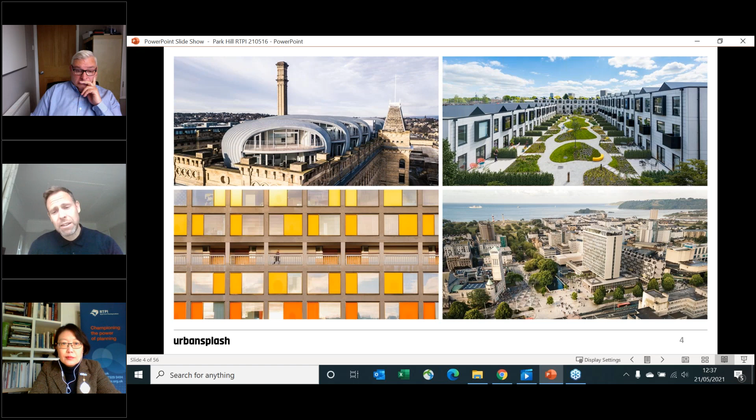We're very much known as an innovative developer, so very design-led, high-quality, design-focused, and we try to do things a little bit differently to other developers. I think we're known within the media as a transformative regeneration developer, and highly innovative. That's all really culminated in a lot of recognition and awards, and I think we're up at over 430 awards now, which is really rewarding for the people working so desperately hard to deliver such great places.

I have pleasure in focusing today on Park Hill. We've been working in partnership with Sheffield City Council to deliver a transformative regeneration of Park Hill. Urban Splash was procured as the council's development partner back in 2005, so we've been working on this scheme for quite some time.

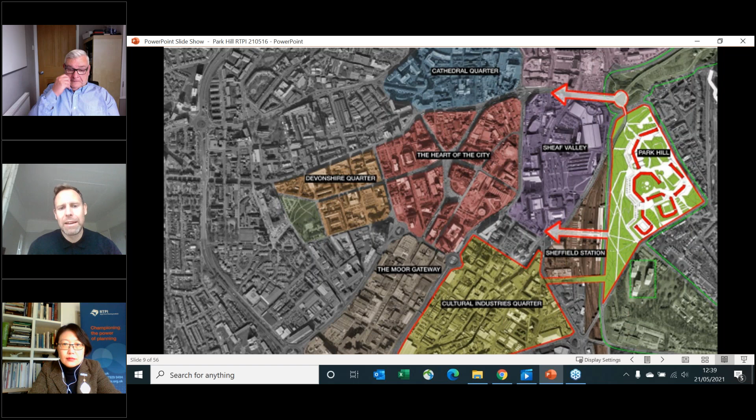In terms of the extent of Park Hill, we're dealing with 33 acres of land immediately to the east side of the city centre, and it could be a quarter of the city centre in its own right. Given its scale, it's really well connected - it's within a 5-minute walk to Sheffield Station, and within a 10-minute walk of the heart of the city. So it's very much a unique 33 acres of land within a UK city centre.

Park Hill is a redevelopment of 5 interlinking blocks. We've master planned it to include around 1,000 homes and about 130,000 square feet of commercial space across 5 phases, the first phase being outlined in yellow there.

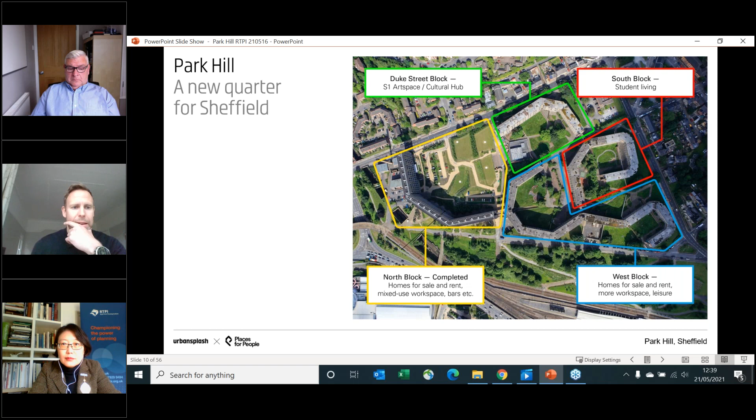In terms of where we've come from, Park Hill was delivered in the late 50s, early 60s, very much a vision of the 2 original architects, who were actually 2 young chaps, both in their 20s, called Jack Lynn and Ivor Smith, who worked for the City Council. A really quite radical design was delivered, particularly for its time - they delivered a brutalist structure. You can see the flanks of the buildings all crank in quite obtuse directions to maximize natural sunlight and the best aspects and views for the scheme.

The height of the roof is at the same level at the top of the site. We're dealing with quite an interesting topography - at the northern point of the site it's around 35 meters lower than the southern top part of the site. There's 13 stories at the northern point and only 4 stories at the southern point, but the roof level remains consistent throughout, so it's at exactly the same height at the northern point as it is at the southern point. The site is very much characterized by the infamous streets in the skies.

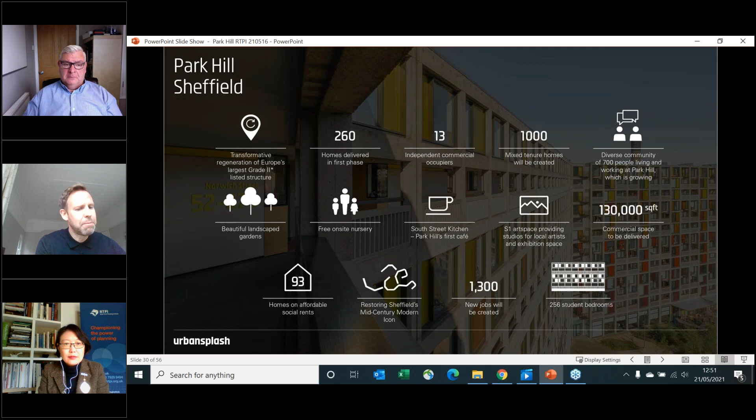We are very proud to say that we've achieved some really tangible socio-economic outputs from our involvement with regenerating Park Hill. It's always great to see the work to date also being recognised by people like Ivor Smith, who was the original architect at Park Hill.

Moving on to the present day, which is what we're dealing with at the moment, the delivery of the second phase of Park Hill. We're working with a London-based architect called Mikhail Riches, a Stirling Prize-winning architect, to bring forward another 195 new homes and 20,000 square feet of commercial workspace and a restaurant bar space. We were awarded the outline reserved matters planning consent and listed building consent in December 2017.

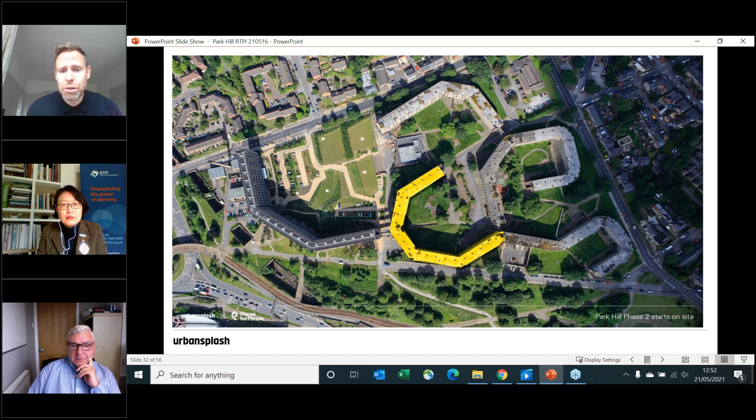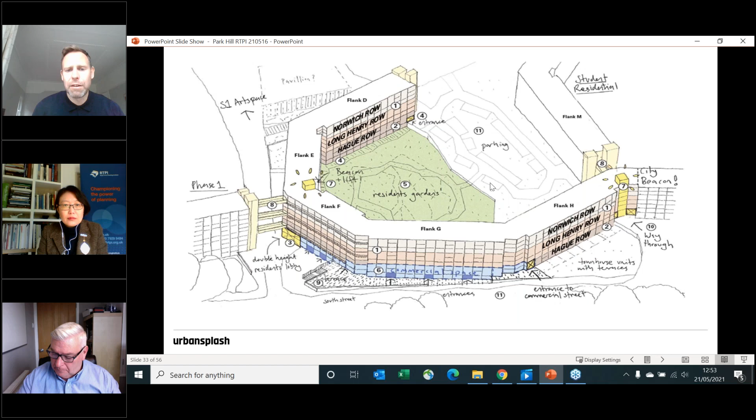We started on site in January 2019, and we're still on site, due to complete this particular phase at the end of the year. The design very much celebrates the open deck streets in the sky, which run from phase 1 over the link bridges into phase 2 and along each flank. In blue is highlighted where we are again creating those active frontages with the delivery of more commercial space to those lower levels. This scheme is centered around really high quality residents' gardens within the courtyard area.

This scheme is more retentionist compared to the first phase. The concrete frame structure is the listed element, which we retained within the first phase, but we included aluminium panels within a glazing system there. In the second phase, we retain the brick infills, the original brick infills. We're grit blasting the original brickwork and retaining it, so it is more retentionist.

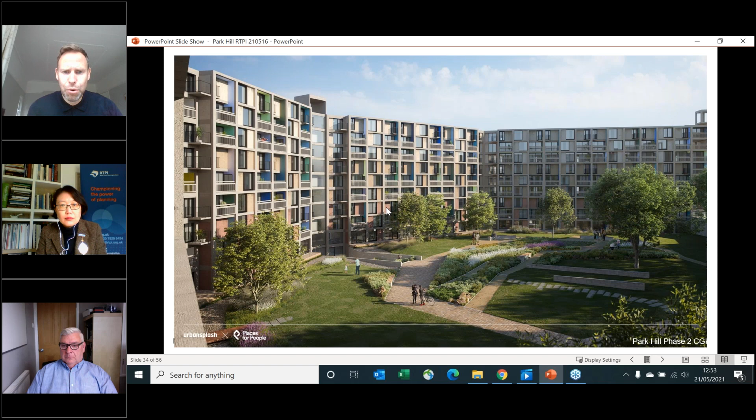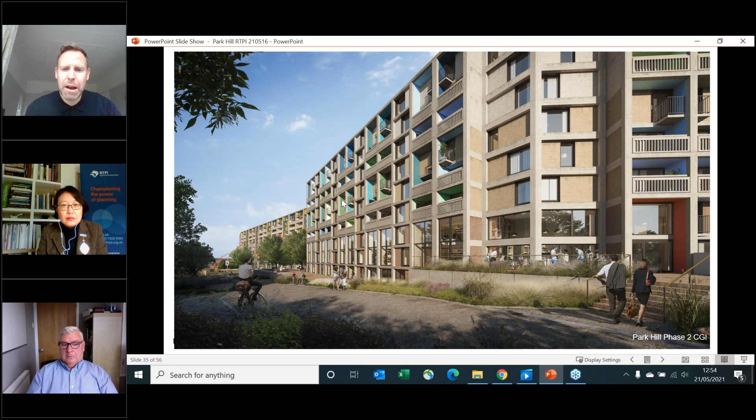This is a view looking down South Street, so you can see phase 1 in the background and phase 2 in the foreground. We introduce colour to the elevations by way of these rendered colour balcony cheeks, but largely it is much more retentionist as a scheme compared to phase 1, which is important from a sustainability point of view—the amount of carbon we are saving by retaining the original concrete frame and brickwork is really important to us.

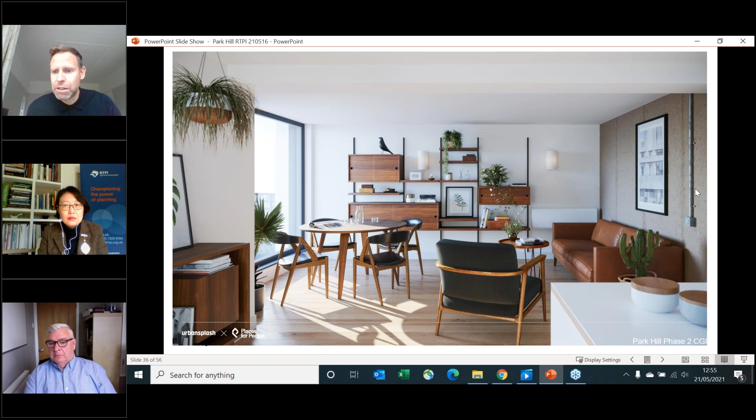We're delivering really high quality finishes internally, retaining and exposing as much of the original concrete as possible. The slight difference is that in phase 1 you've got a high level beam running to the external facade; now we are insulating and plastering, because we suffered a bit of cold bridging which affected the efficiency of the homes in phase 1. So it's important to deliver as highly efficient homes as possible by insulating as best we can, but we do retain the original character where we can on internal walls.

The works to the elevations are actually largely complete now, so all repair works to the original concrete frame are complete, all works to the brickwork are complete, the windows are all installed, and the precast balustrades and handrails are all installed. The only thing that needs to be dropped in here is the full height glazing to the commercial space at lower level.

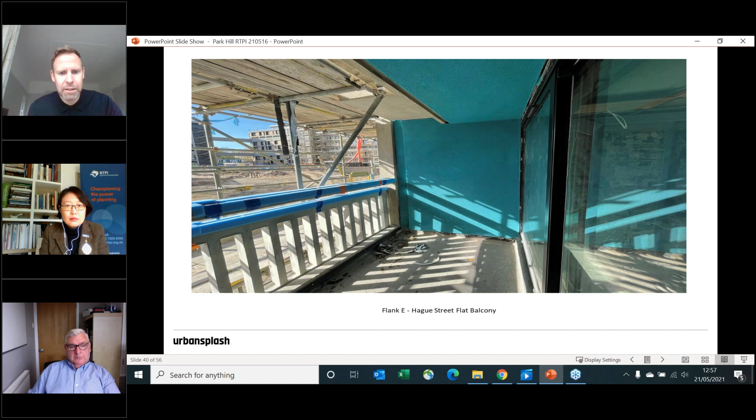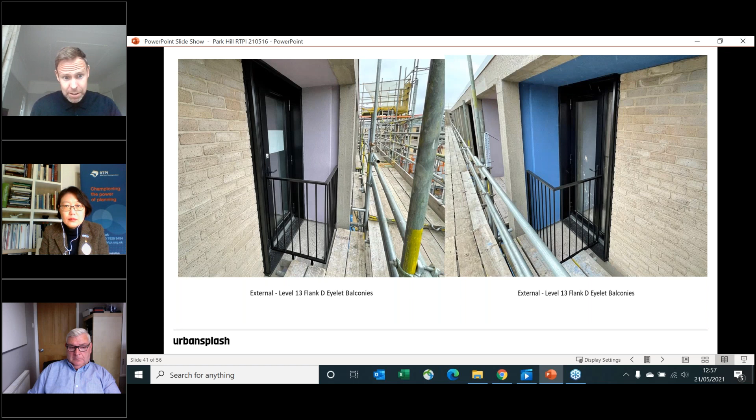This is an image of the entrance lobby - a really quite amazing space, an imposing double height space. We've formed the space now and need to put in the finishes, but we'll be exposing as much of the original concrete as possible, even the concrete scarring, which we'll retain and have on show. We'll render the soffits and walls, put in a new floor finish, new lighting design and signage design. But largely, a lot of the concrete will be left in its raw form, and we really want to celebrate that.

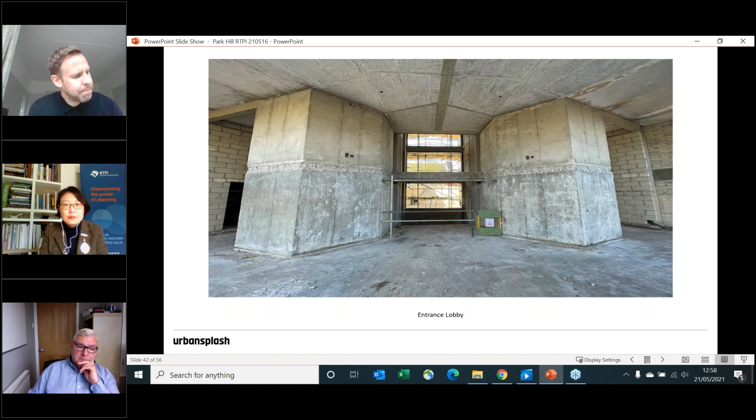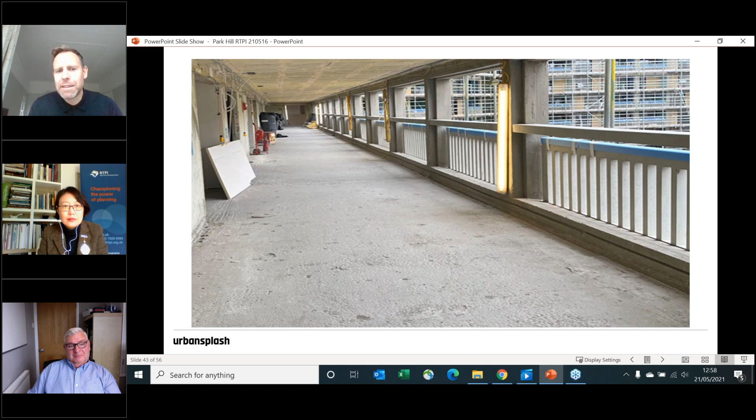This is an image of one of the streets in the sky - the 3 metre wide streets in the sky, where milk floats used to travel down, but very much seen as social spaces when they were originally delivered.

We're now installing kitchens and working on the finishes to the bedrooms. We're making really good progress, and it's proven to be a hugely successful scheme in terms of sales as well. We're delivering 195 new homes, we've sold or reserved 155 homes, and we've got 40 left to go, and we're due to practically complete the scheme in December. So we're on target for it to be fully sold as a scheme, which will be hugely successful.

I think that's testament to the original design, the original vision of the architects, and the uniqueness of these streets in the sky, the open deck access, and the fact that every apartment is a duplex benefiting from dual aspects. The sales of the homes are proving to be really successful.

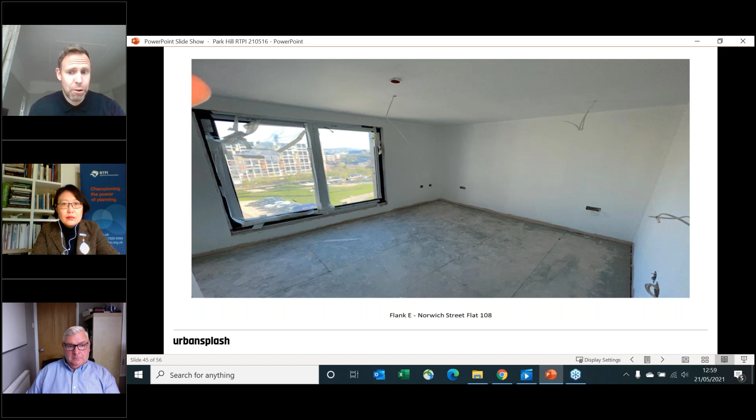When phase 2 completes - and I'll come on to phase 3, which is actually completed already now - we'll have the spine of the scheme completed, and in large the regeneration of Park Hill quite far advanced. When phase 2 completes, we'll grow from a community of 700 just in phase 1 to a community of about 1,500 people all living and working in Park Hill between phases 1 and 3. Phase 4 is the next scheme, which overlooks Duke Street, which I'll come on to in a moment.

In terms of phase 3, we partnered with a specialist student residential developer called Alumno to deliver 356 bedrooms. This scheme, again designed by Whittam Cox who are based in Chesterfield, has more of a retentionist look and feel and aesthetic.

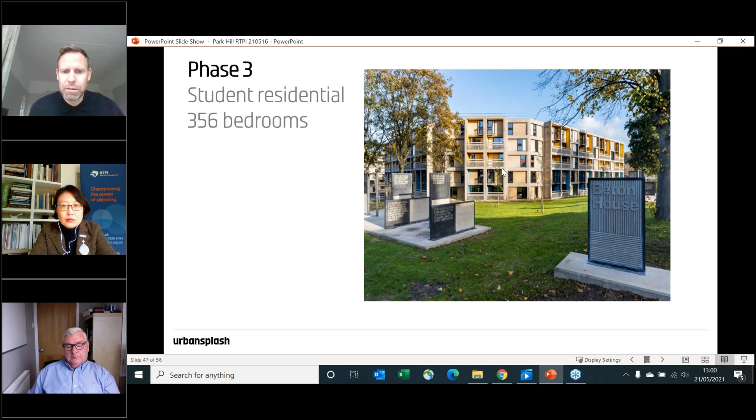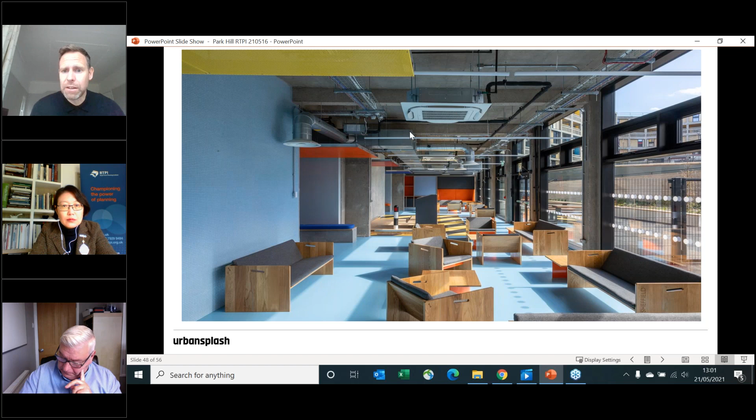You can see the original brick infills all being retained as part of this scheme. Similarly internally, a lot of the original mosaics have been retained, and the concrete exposed to the walls and soffits where possible. I can honestly say the quality of the accommodation compared to my student days 20 years ago is on a completely different level.

At Urban Splash, we try to carefully curate all ground floors. So whilst we sold the building to Alumno and they delivered the student residential scheme, we've taken a lease back of the ground floor so we can curate the right active uses. We've agreed a deal with a convenience store operator, worked with them on the design of their branding and the naming of the store - it will be called Park Hill Provisions. That's an example of how we try to curate those ground floor uses and frontages, making sure we don't let to a Sainsbury's or a national operator, and keep it as independent as possible, which we think suits Park Hill.

We're now working quite hard on bringing forward the delivery of the next phase, phase 4, and we're looking to deliver 106 new homes, a new cultural hub for S1 Art Space, a new build art gallery for S1 Art Space, all surrounded by beautiful landscape gardens.

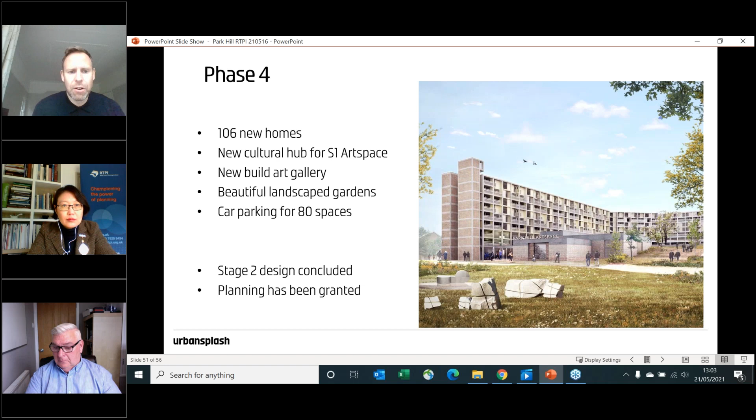We've taken forward a design and concluded design stage 2, and submitted a reserved matters planning application, which we got approval for, which was great news. We're currently working on grant funding opportunities, with a view to hopefully starting on site in 2022.

Everything coloured up is what S1 want to take and will deliver as artist studios, workspace for the creative sectors, a new auditorium, a new learning centre, and community facing centre, and that new build gallery that interfaces with the original flank.

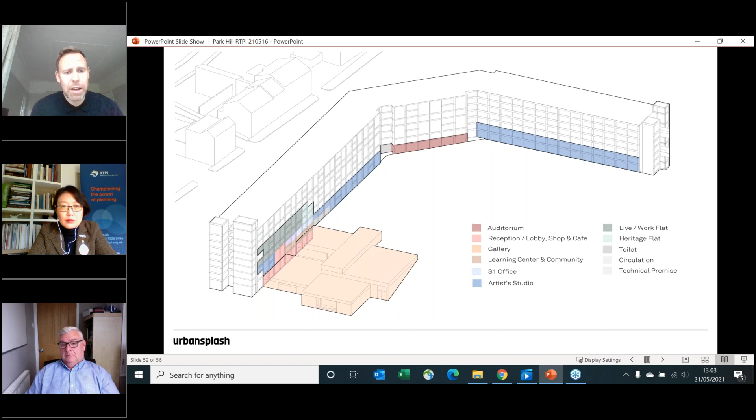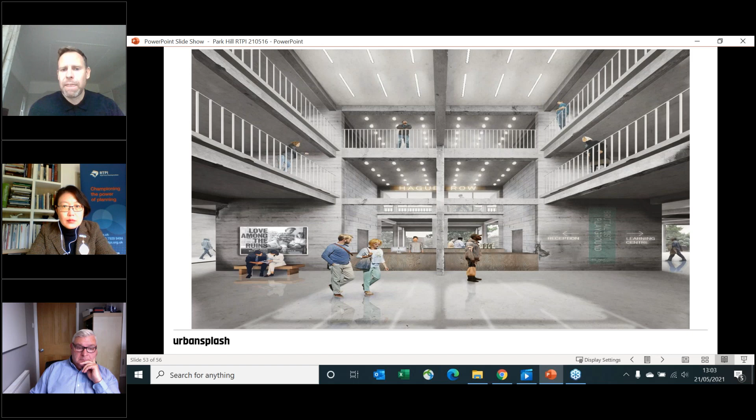And this is a quick view of the main entrance reception for S1, really exposing and celebrating the original concrete frame with this triple height entrance lobby.

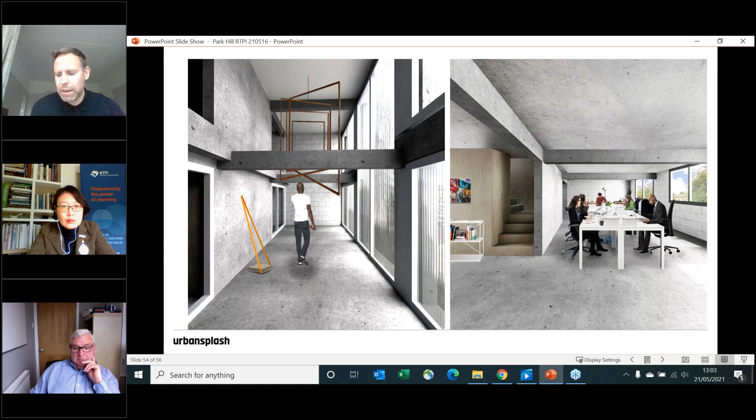A couple of images of what the art space will look like, what the workspace for the creative sector will also look like, and also an image of the new build gallery that we are looking to deliver.

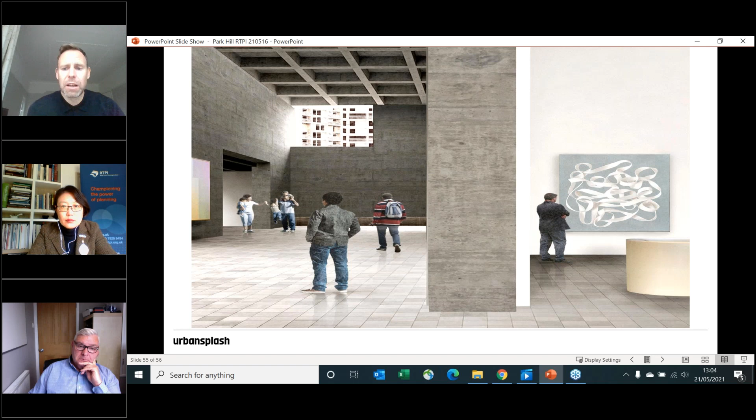This scheme would be absolutely amazing for both Park Hill and the local community, but also for Sheffield, because it could be a real catalyst for the visitor economy. We were forecasting 80,000 visitors per year to visit this scheme once it's complete, hopefully in 2024.

We'll then start to look to deliver phase 5, which will be the last phase to deliver at Park Hill. Whilst we've not carried out any design work on phase 5, we hope to deliver another 110 to 115 new homes for Park Hill, and that will conclude the regeneration of Park Hill that we all desperately want to see, and leave a really positive, lasting legacy well into the future for this fantastic landmark scheme.

And that's the end of my presentation.

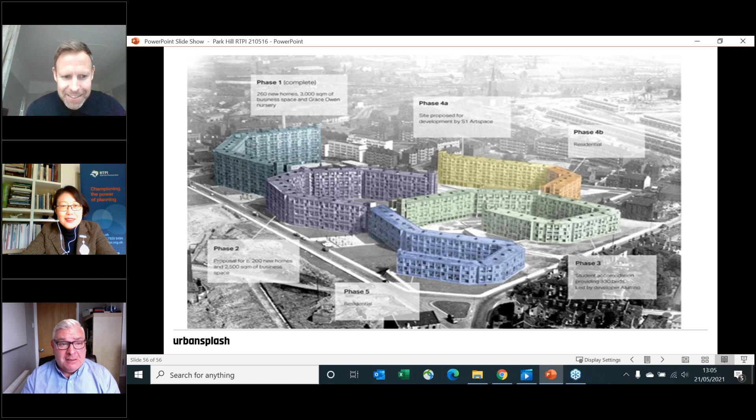It was prompted partly by the questions by Esmond Sage, who asked about the level of affordable housing that was being provided. Early in the presentation, you highlighted it as 40%. But coming from the public sector and working with developers all the time on the conversion and adaptation of buildings to residential, the consistent argument is the extra costs involved in conversion and adapting as opposed to new build. I appreciate you had a listed building to contend with, which forced your hand somewhat. But could you tell us how you've managed to achieve a staggering 40% affordable contribution amidst the extra costs involved? I imagine there was a lot of subsidy coming in. You can tell us a little bit about that.

That would be helpful. Yeah, absolutely. The affordable allocation that we have to aim for at Park Hill is actually prescribed in the outline planning conditions, and that is to deliver a site-wide allocation of 20% affordable.

In phase one, we've delivered 40%, and whilst I wasn't directly involved, we were successful in being granted grant from Homes England that assisted with the delivery of phase one, and we agreed a deal with Great Places Housing to essentially purchase, I think it's 94 homes for social rent. So hugely successful as a scheme, incorporating quite a significant amount of affordable, and has helped us deliver a real mix of tenures within phase one, which really contributes towards delivering a successful local community.